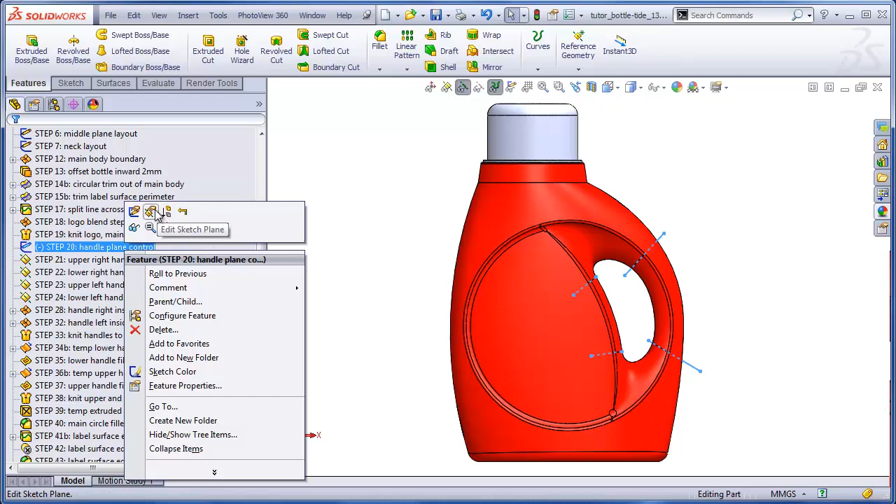This is part 3 of the Tide Bottle project. By the end of part 2, we'd completed the boundary for the main shape of the bottle, the recessed label area, and a step that joins the recessed label and the main bottle.

For this video, we are going to build a boundary for the right side of the handle surface, a boundary for the left side of the handle surface, a fill surface for the lower portion of the handle, and a fill surface for the upper portion of the handle. We will then knit all those surfaces together,

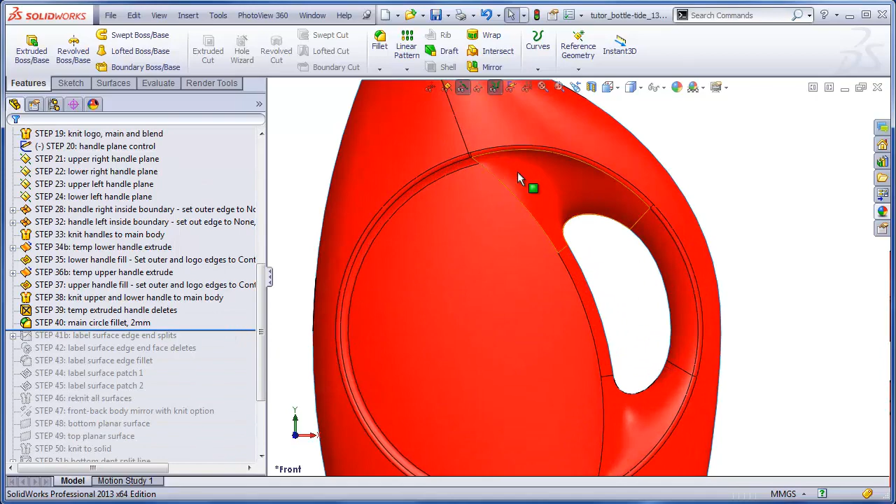and we'll add a fillet to this circular edge, and then we will try to add a fillet on this edge of the label surface, but we are probably going to have some trouble doing that because this surface becomes very flat in this area and it won't want to fillet in this zone.

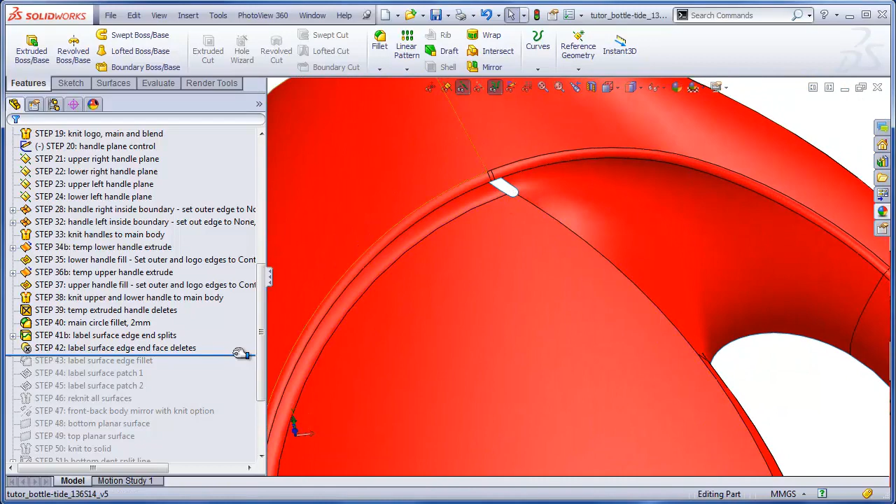So we will do a little trick where we will remove a little bit of our surface here, add a fillet, and patch it back in. We'll reknit everything together again, and that will leave us with all of the surface features to create one half of a bottle. This will take 26 or so steps to accomplish.

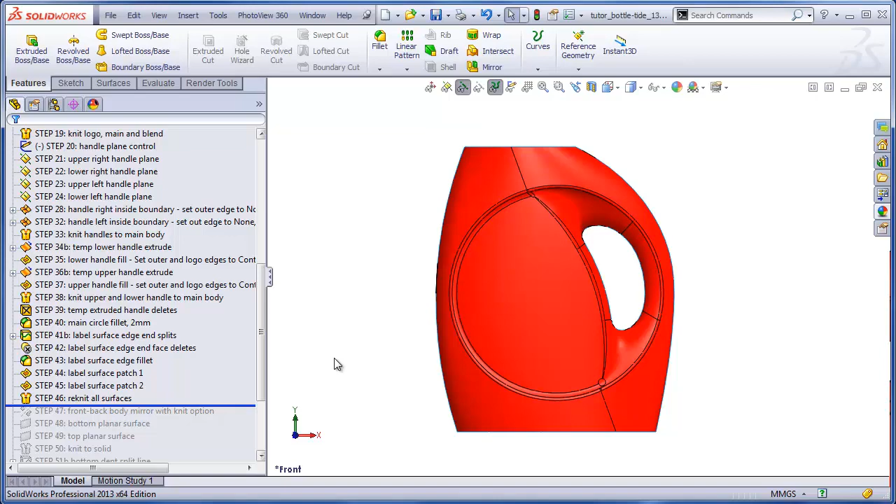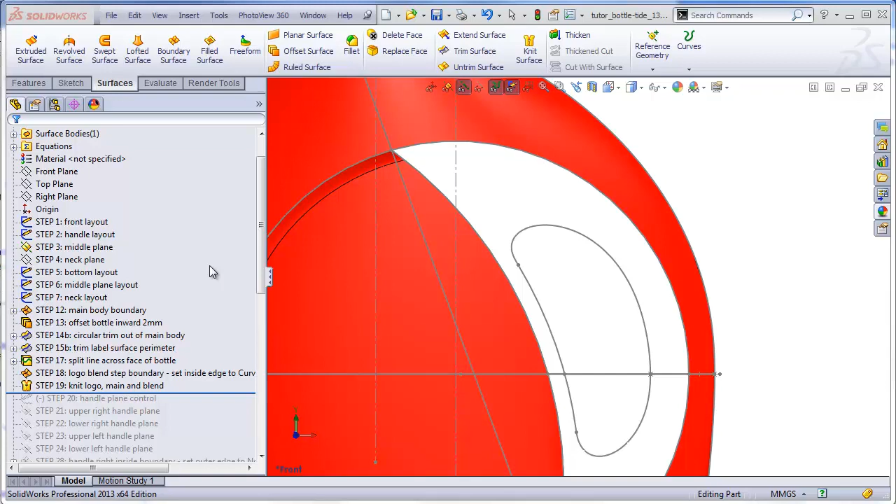So now what I'm going to do is roll back to where we were when we left off on the last video. Turning on my sketches, I see all my layout sketches here. What I need to do is create 4 different planes in order to build the surfaces of the handle. These planes are going to be tilted at some odd angles, so what I want to do is create a sketch that will control the location and orientation of those planes. So I'll roll forward to show you what my sketch looked like that did that.

When I drew my handle layout sketch, I just drew this as 2 lines. One is an offset arc, and the other is a spline that starts at the top of the arc, curves back down to the bottom of that arc. You may have drawn this in 4 pieces with 1, 2, 3, 4 pieces. In either event, you need to have 4 lines total. Where any arcs join together, such as here and here, that's where you want your lines to go.

So I'm going to have a plane right through here where these 2 curves join, a plane right through here where these 2 join here, and then in my case these 2 are located in arbitrary locations to split this upper area and lower area from this outer area. But if you have an arc that joins to this arc, then you want to put your line right where that join is here, and this line where you would have a join down here.

You can see that I haven't added any dimensions to any of these lines. It might be a good idea, that way you can have a precise angle control on each of these, but for now I'm just eyeballing it. I'm going to close this sketch now.

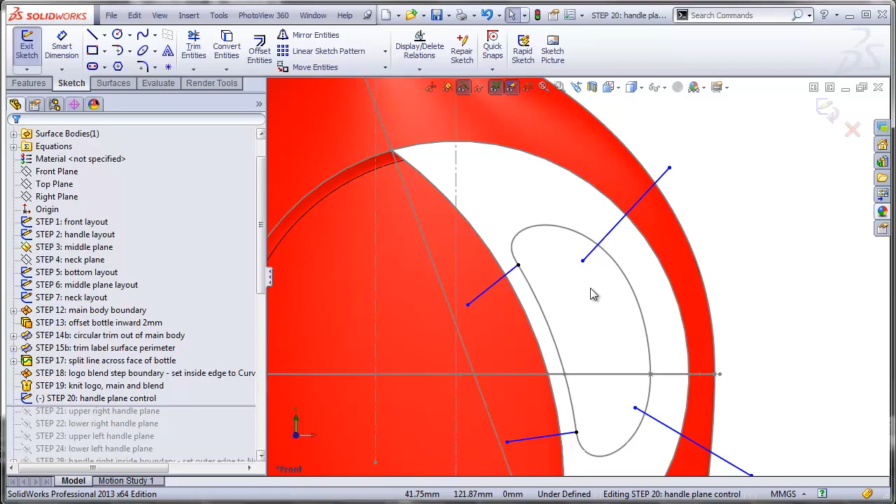And the way I'm going to create the 4 planes using this sketch is to simply go to my reference geometry for planes. And the first thing I will choose is my front plane, and I'll start with this line here. And what that's going to do is default to making a plane perpendicular to the front plane going through that sketch element.

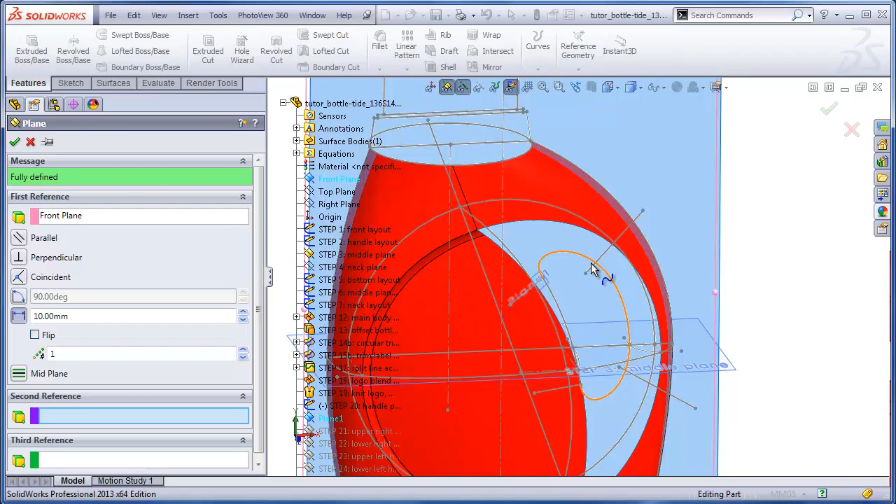Do the same with the next plane. Again, go to reference geometry plane, choose my front plane, and now this sketch element, and that makes a plane perpendicular to the front plane and passing through that element. And we do the same for these last 2 lines as well.

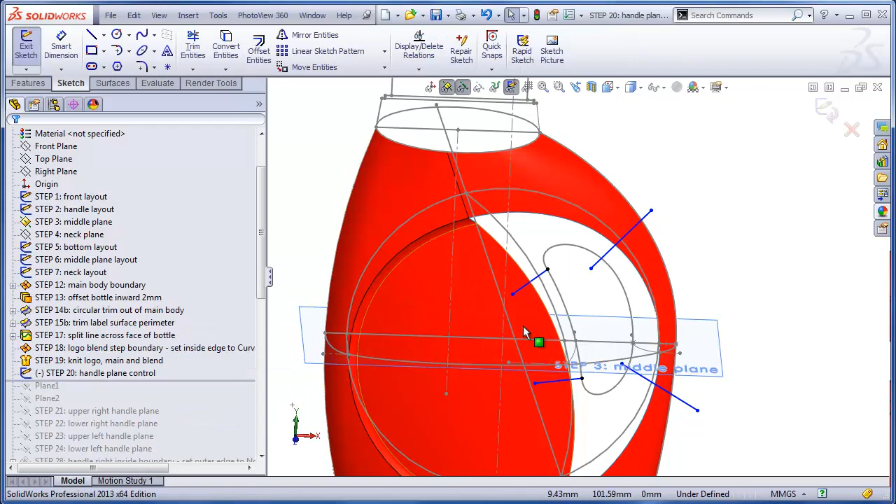So this takes a total of 5 steps to complete. 1 step for this sketch that controls the orientation of the planes, and 1 step for each of the planes that's actually created. Another way you could do this, if you want to be a little lazy about it, is just create this sketch and then just go ahead to your surfaces and extrude those lines. And it doesn't really matter how far you extrude them.

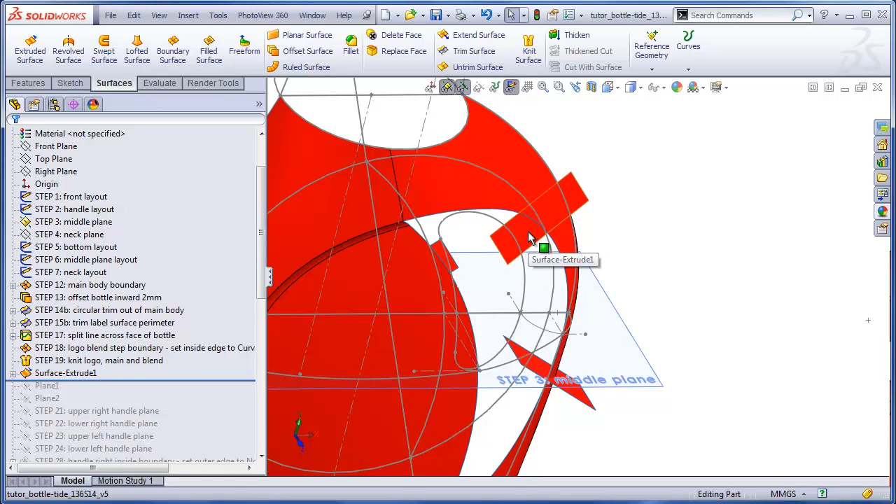Now what you've got are 4 flat surfaces, and you can use these as sketch planes instead. And it doesn't even matter if they're too small to contain the sketch that you want to put on there. Once you select the flat surface as your sketch plane, you can draw the sketches as large as you want.

Once you are done using these surfaces, you can then delete them by going up to your surface bodies and just selecting all of them, right-clicking and saying delete bodies, and that gets rid of them, cleaning up your model. Now, I only recommend using this trick if you plan on using these extruded surfaces for just 1 or 2 sketches and then plan on immediately getting rid of them. Otherwise, you're going to find your model being rapidly cluttered up.

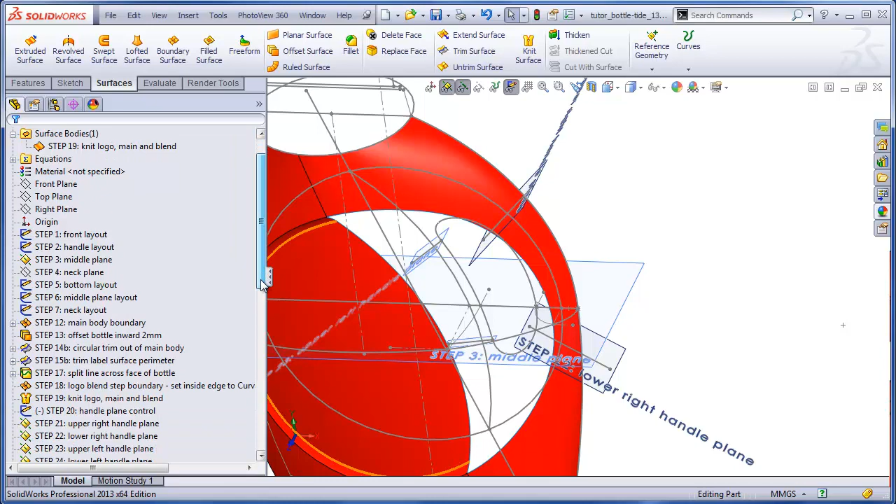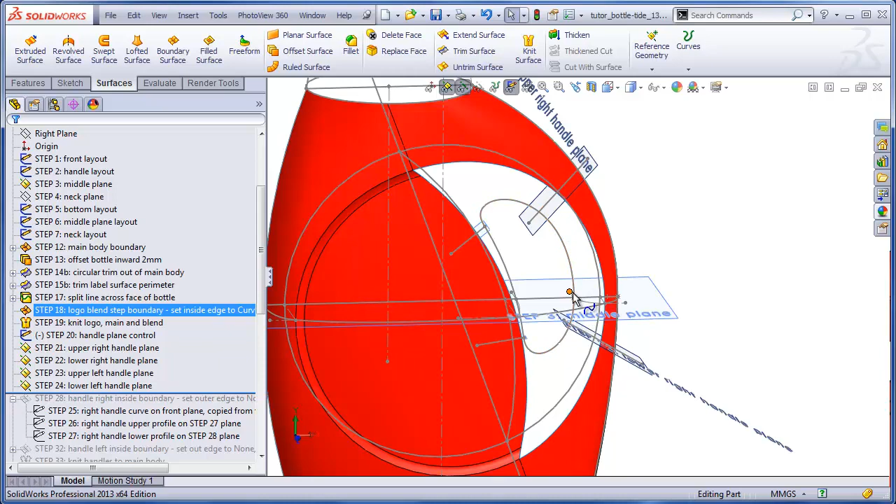I've rolled my model forward to the point where I've already added these 4 planes, as you can see here in the front view. Now I'm going to start building some sketches that will be used for this portion of the handle. The first thing I want to do is make a sketch of this line on the front plane. So I'll do that by starting my sketch. I'm going to copy this element from my layout sketch.

And I actually need this spline to start here and end here. And I can do that by trying to drag these points around to my sketch planes, but a lot of times that gets a little unpredictable when you try to do that with splines. So instead what I'm going to do is copy this line and this line from my plane control sketch and use that to trim away the excess. So clicking here and converting entities, and here and converting entities.

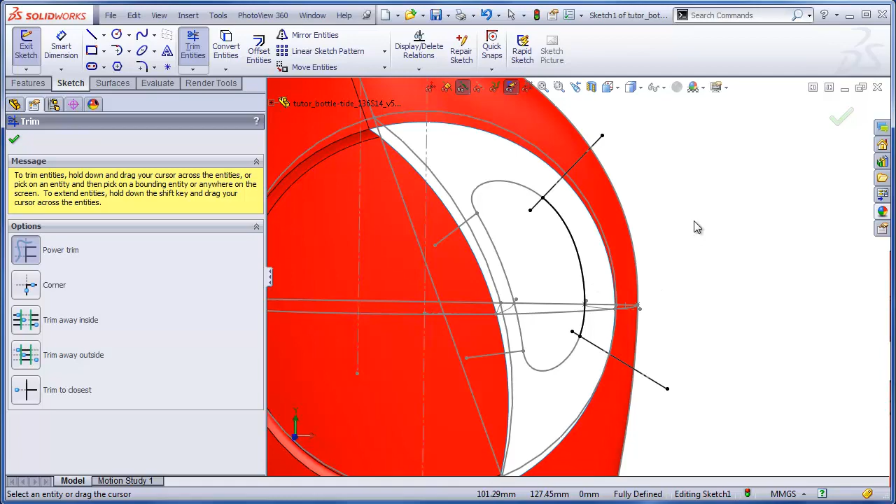Let me hide all of my planes here, which are creating a little clutter. I'll turn these two into construction lines and now use those to trim away the excess. That gives me just the piece that I need for this boundary, which will be built here. Now let me hide some of my layout sketches so I can see exactly what I'm doing. Here's the sketch that I just made. That's going to form this edge of the boundary on the front plane.

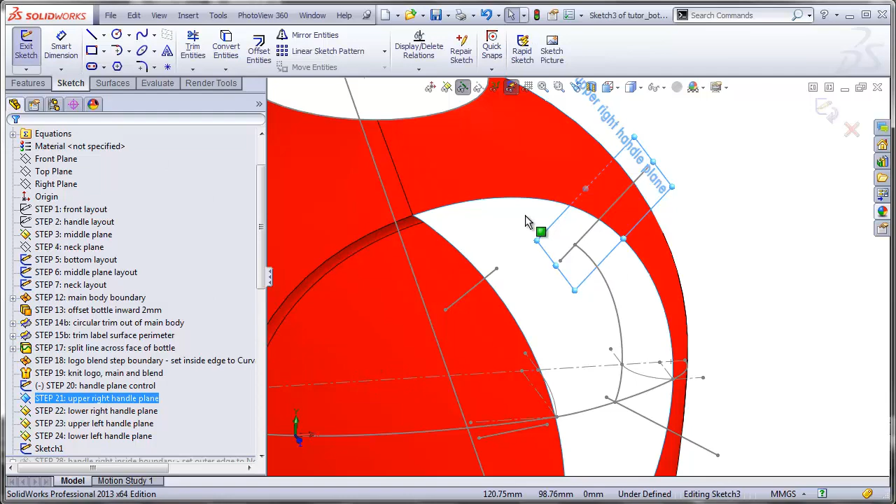We need to add a profile going from this point up to this open edge of the bottle. Later on we're going to add another one down here. This profile will go onto this plane here, which I've just highlighted. So we will make a new sketch. And I can draw either a spline or a simple arc. I could just use a 3-point arc, go 1, 2, 3, make this end pierce this arc here, this end pierce the opening of the bottle.

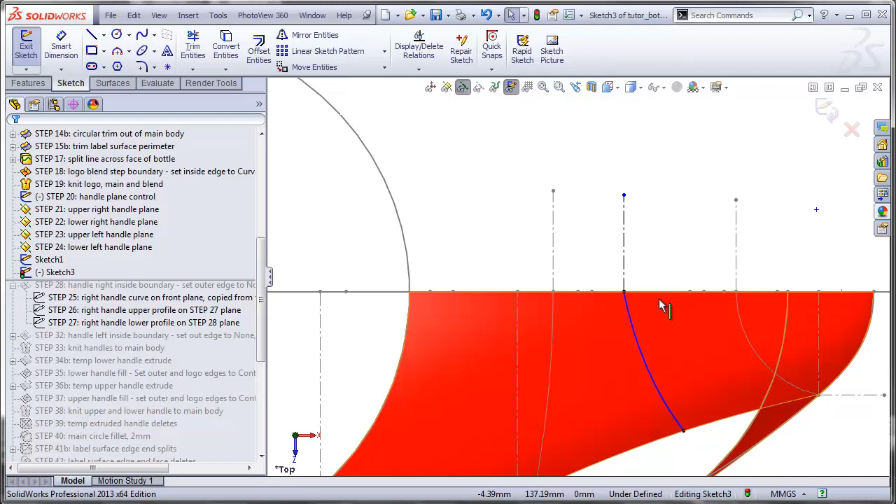Looking at this from the top view, we'll add a construction line and make that tangent to the arc. I think I'll just leave that as an arc for now. I need to draw a similar profile down here. That's going to be on this lower right handle plane. So making a new sketch. Since I drew an arc up here, I guess I'll just do the same down here.

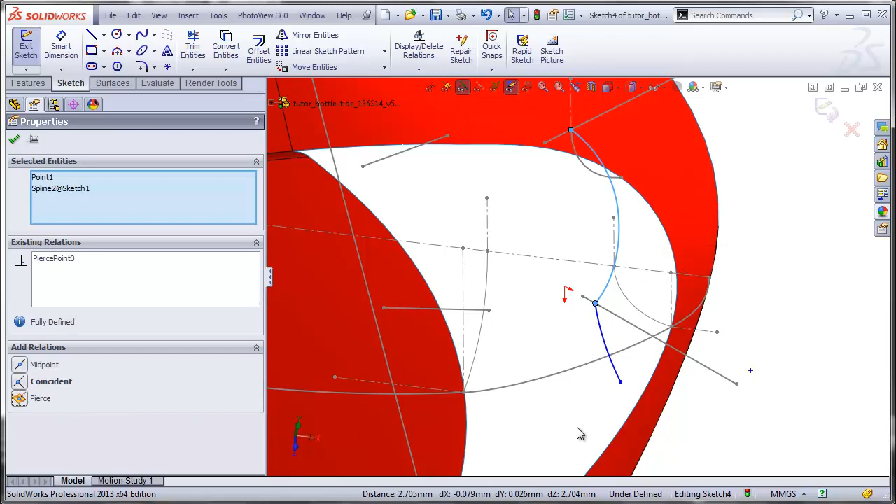So 1, 2, 3. Pierce to this end. Pierce to my opening. Again, looking at this from the top view, adding a construction line and making those tangent. I'll finish that sketch. Now I've got all the elements that I need to make this portion of the handle.

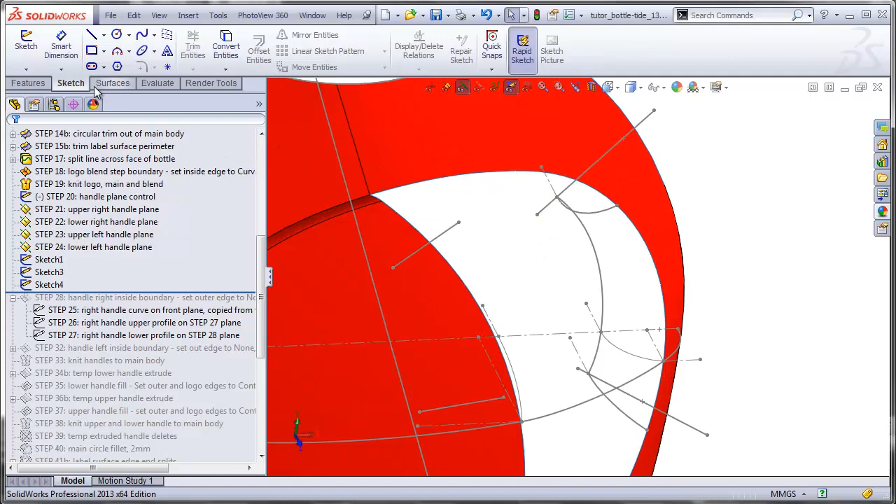Going to a surfaces boundary, select this sketch, then I'll select the opening of my handle. And you see, because this edge is going all the way to here, it wants to make the boundary go all the way to this point. I'm not going to worry about that because as soon as I add direction 2, which will be this sketch and this sketch, it's going to automatically trim that back to those sketches.

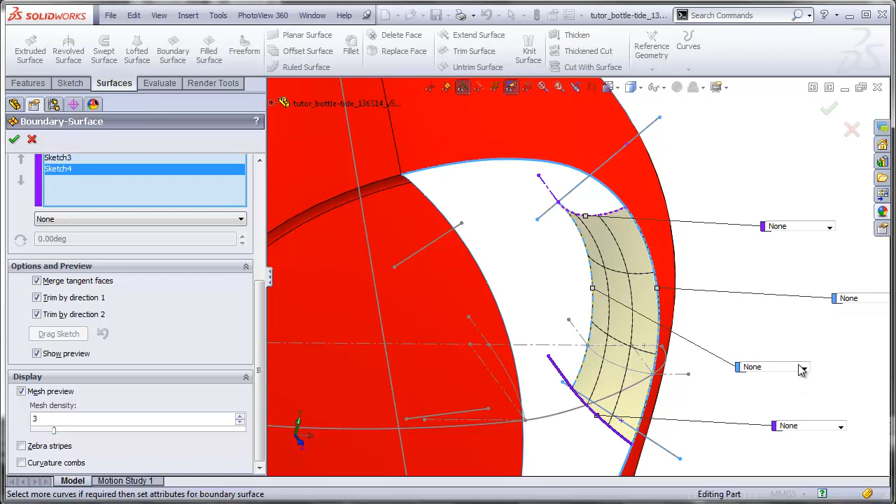If I want to be super careful about it, I can always activate the trim by direction 1 and by direction 2, but it's not changing anything here. So let me just turn off the curvature comb so we can see that a little more clearly. Now, because I want to mirror this handle later on to the other side, I need to make sure that the setting along this edge is set to normal to profile. And there's the first surface for my handle. Now I'm going to build the handle surface on this side using a similar technique.

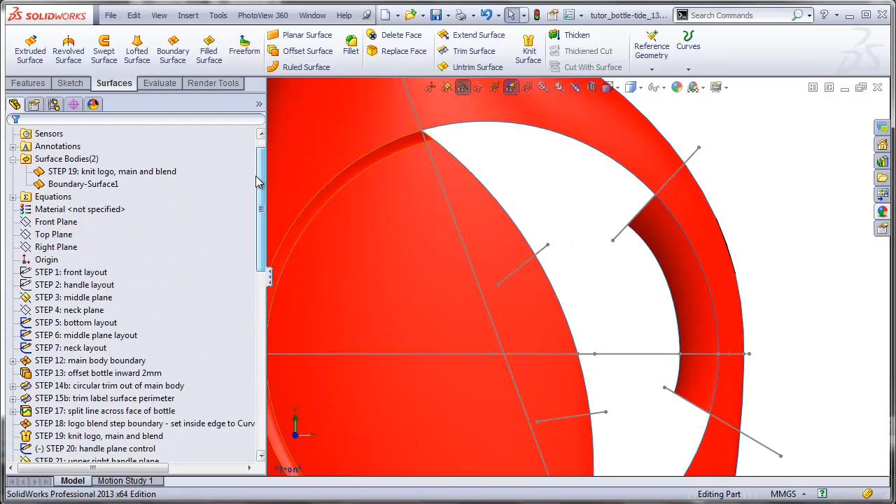And I need to copy this portion of the handle contour from my handle layout, so I will make that visible. I will make a new sketch on the front plane and just copy this arc right here. Now I'm going to draw some new contours on this upper left plane here and my lower left handle plane here.

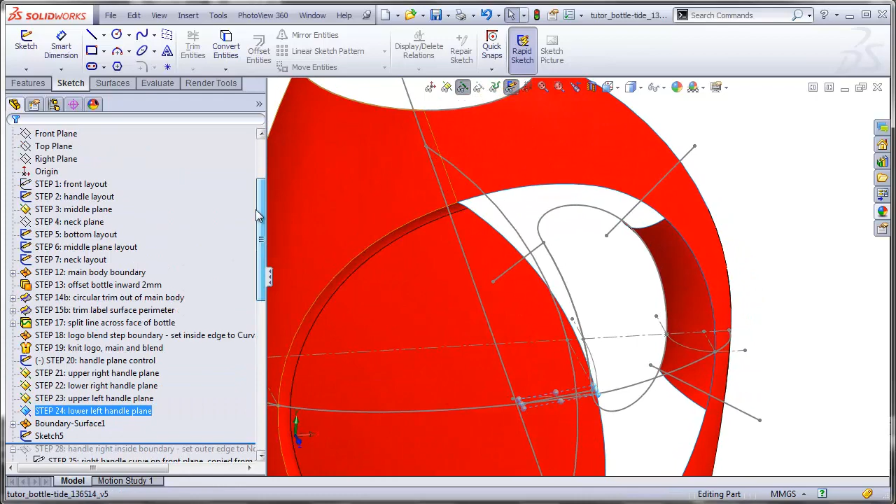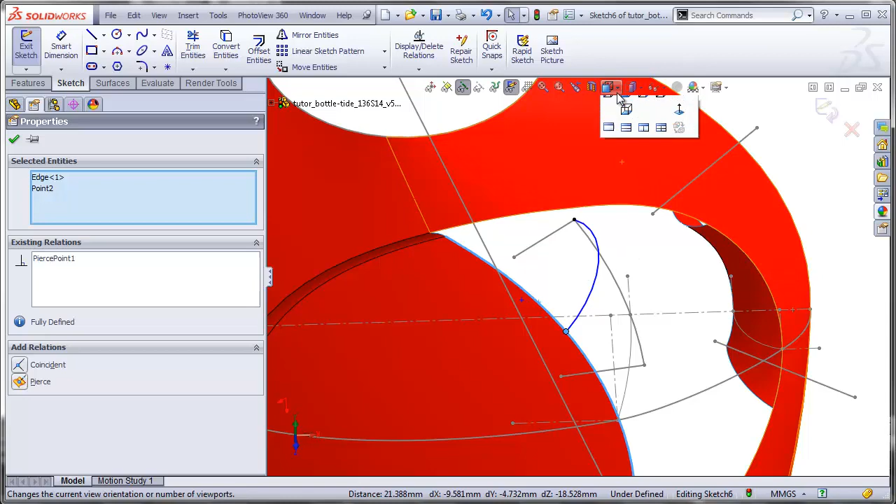First I'm going to hide my handle layout, so all I see is this sketch here. Making a new sketch on this plane, we'll do the same thing where I think I will just select a 3-point arc, piercing to this arc here, piercing to this open edge here. Looking at this from the top view, making a construction line and making that tangent.

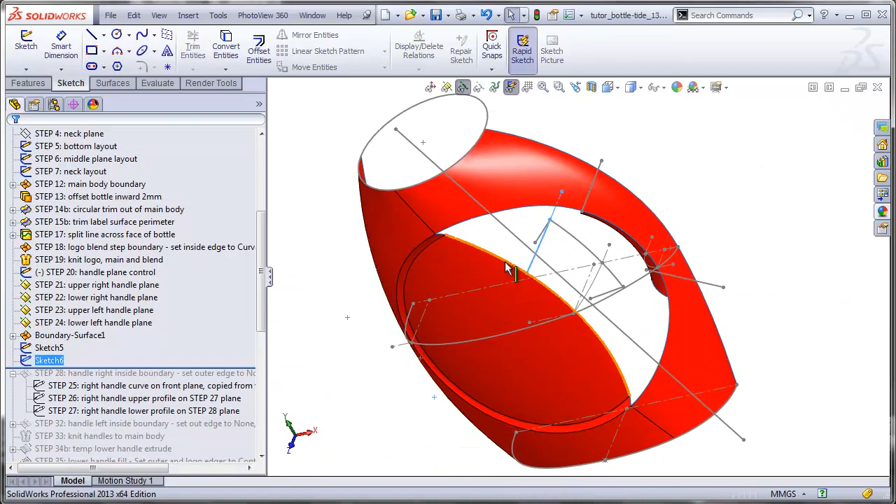And again, if you decide to do this as a spline, make sure that the handle for the spline at this end is going straight up and down. Now on our last plane that we created, we're going to make one more sketch. Again, going with a 3-point arc, pierce, pierce. Take a look at this from the top view. Make our construction line. Make those tangent.

And we have all the elements we need now to make this boundary surface. Something that's interesting here is you recall that when we made this middle layout sketch, we actually made a sketch of where we thought that surface was going to go right here, and also where we thought this handle surface was going to be going right here. As it turns out, we didn't even use those at all. In fact, I can even hide this sketch because it's just getting in the way.

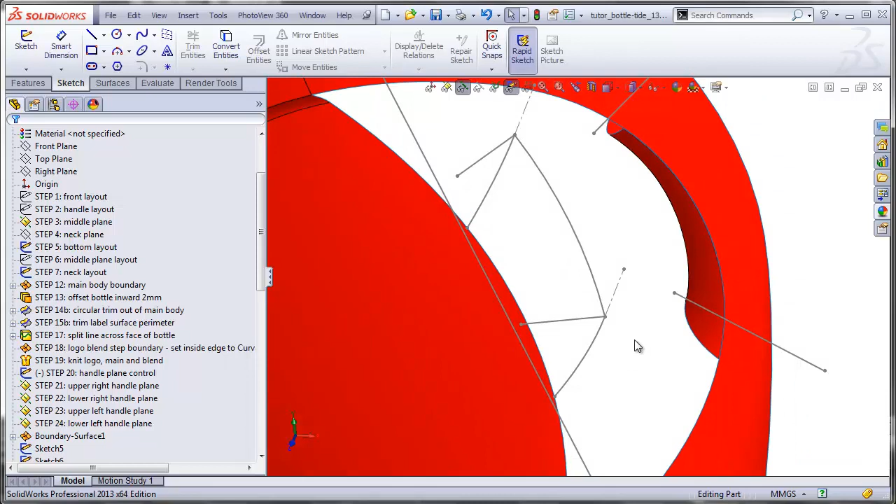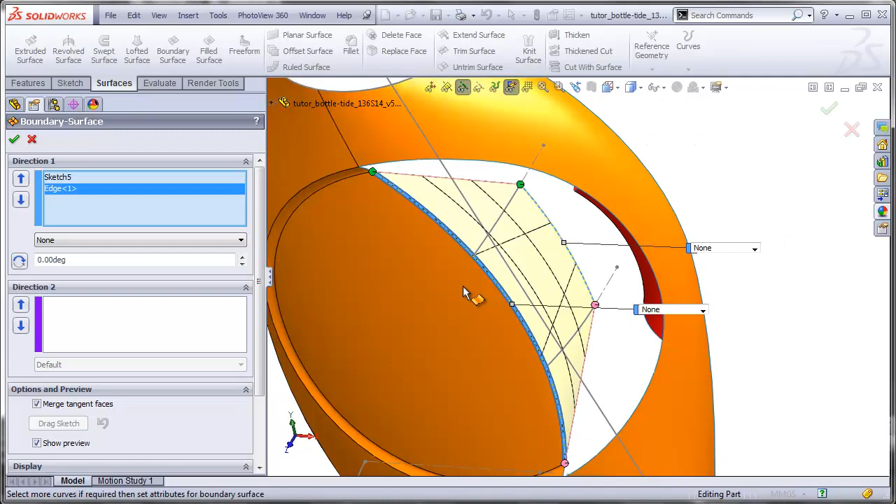So now we can make another boundary using this edge of the opening, these two new contours that we created, and this contour here. You can also hide this sketch here, which was used for making our handle planes. And going to surfaces, once again, boundary surface, select these two elements for direction 1. And again, it wants to make the boundary go all the way to here and all the way to here. Don't worry about that. And for direction 2, we select this sketch and this sketch.

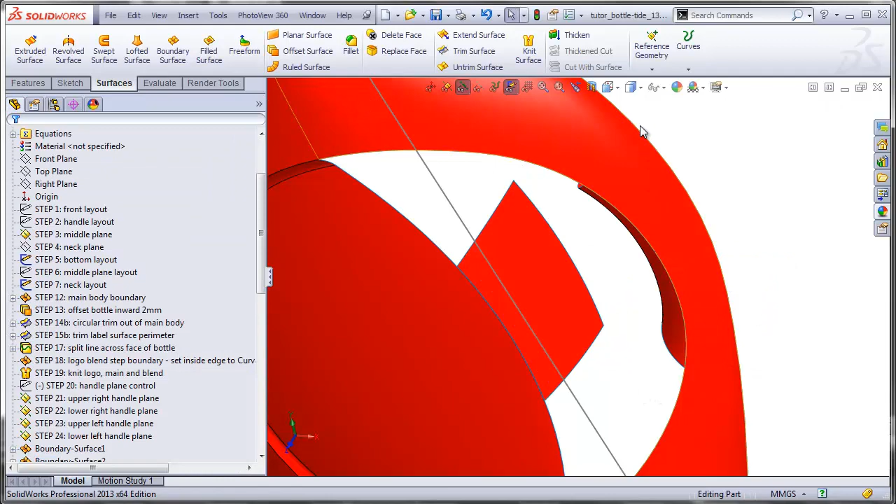Now we see it's trimmed back to where we want it to go. And once again, on this edge, we want to make this normal to profile. And finish. So here we see our first two surfaces of the handle. Now we are going to build this lower surface of the handle, and if I turn on the handle layout again, we see that this surface is going to require 1, 2, 3, 4, 5, 6 edges.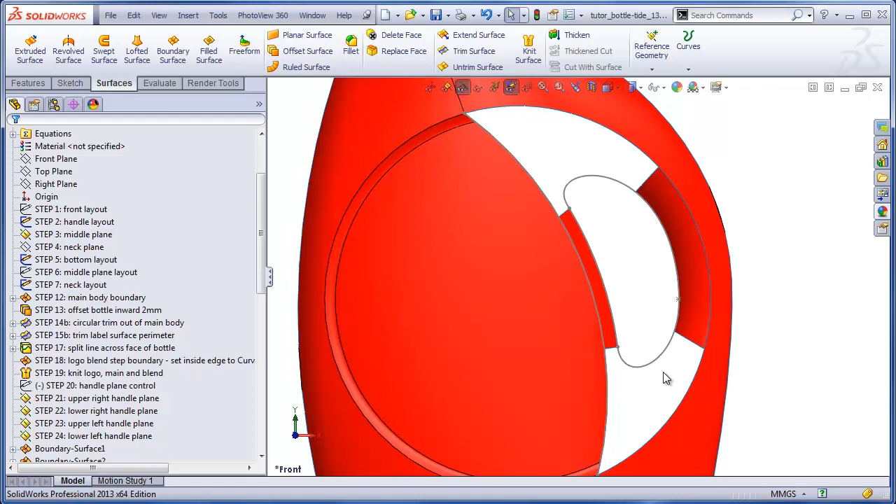We know that we can't do that with a boundary, and we will have to use a fill surface. We also know that fill surface does not have a normal to profile option. So if we attach the fill surface to an edge here, we don't want to attach it to a sketch because we won't be able to control the fill surface where it meets our mirror plane. So we will use the trick of copying this portion of our handle layout sketch and extruding it normal to my mirror plane, which in this case, of course, is the front plane. So starting a new sketch on my front plane.

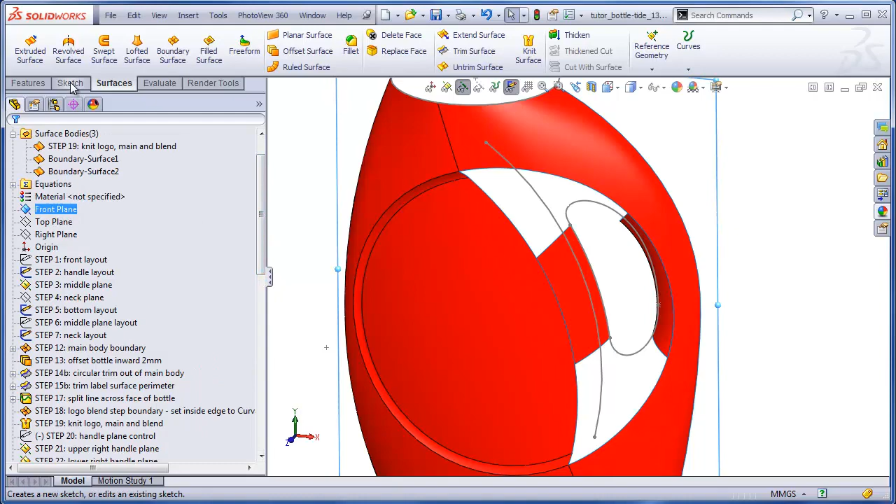I'm also going to turn on the sketch that controlled my planes for the handle because I can use that for doing some trimming. I'm going to copy this curve here, but I only need this portion here. So I will also copy this line from my plane control sketch, turn this into a construction line, and then trim away the portion that I don't want.

Now I can extrude this surface. I want to go in this direction. And the distance doesn't matter too much. I'll just make that 10 millimeters for convenience. And now I have all the edges that I need to build this lower fill surface.

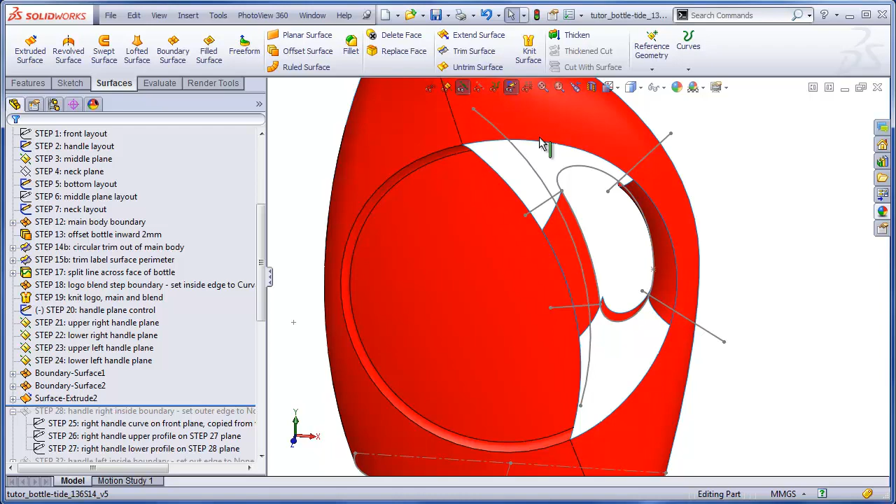So hiding my sketches, go to Fill Surface, click on 1, 2, 3, 4, 5, 6 edges, and you notice that it does not want to make a fill surface. So what is the problem here? The problem is that this edge here should really begin here and end here so that we have one contiguous loop for the fill surface. But we know that this edge is actually wrapping all the way around to here.

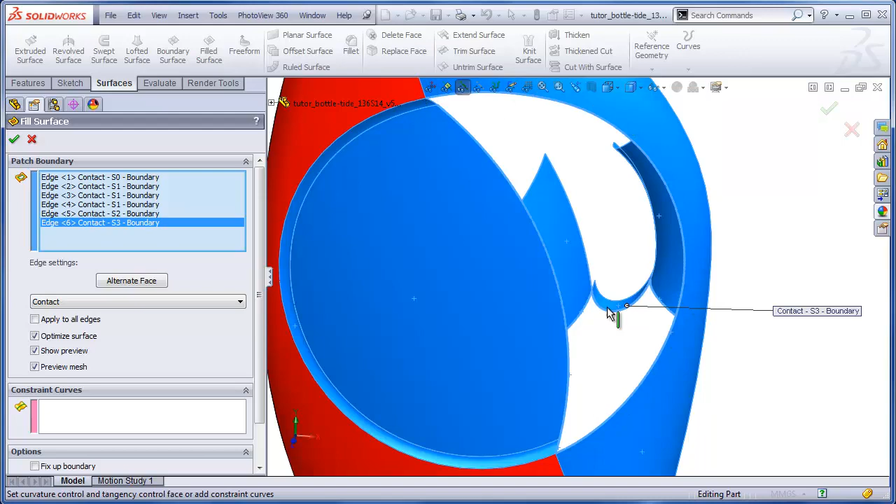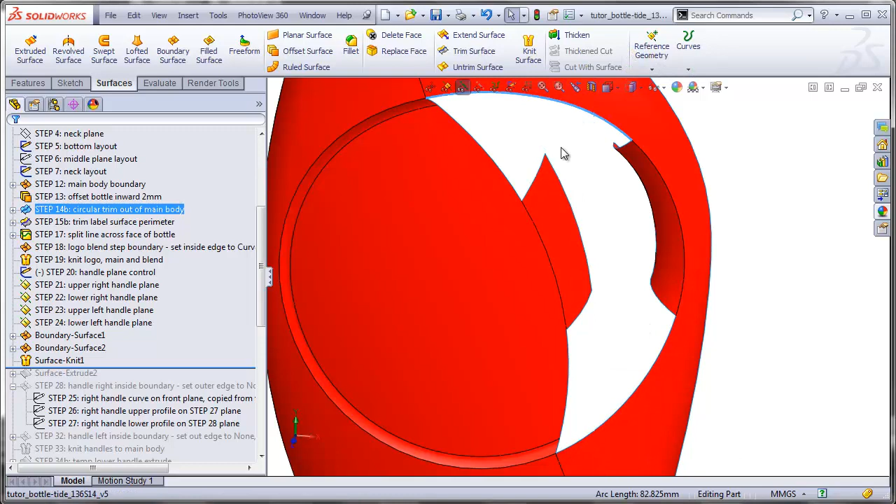So how do we solve this problem? The answer is that I'm going to roll back before I made this extrusion here. And all I have to do is knit all these surfaces together that I currently have. So going to Knit Surface, I will just knit together these 3 surfaces. And now we see that this edge is beginning and ending where it needs to, and the same will happen for this edge as well. Now I can roll forward. Here's my extruded surface that will be used as an edge for my fill, and now I can successfully do the fill surface.

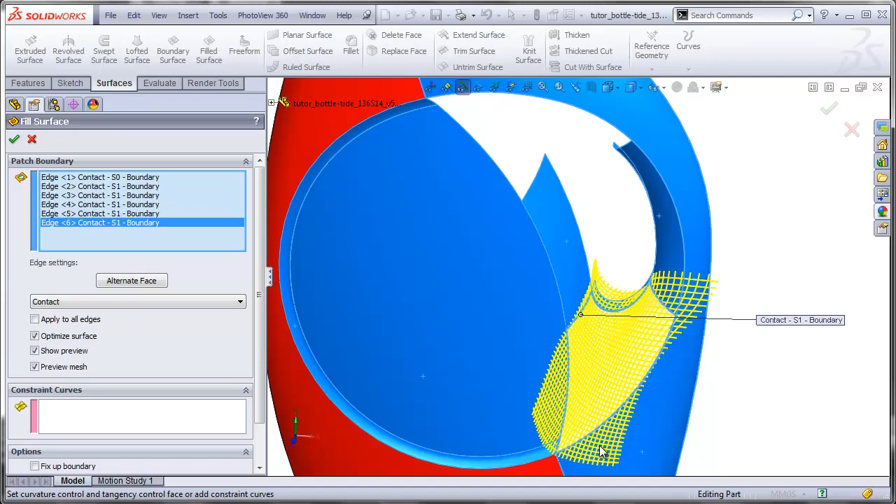Once again, 1, 2, 3, 4, 5, 6, and we see that the fill surface is successful, and I need to do some controls here to make this shape properly.

This edge at the mirror plane needs to be tangent. This edge where we join the actual handle surface wants to be curvature. This edge is going to be a sharp edge until we later add a fillet, so that should be left as contact.

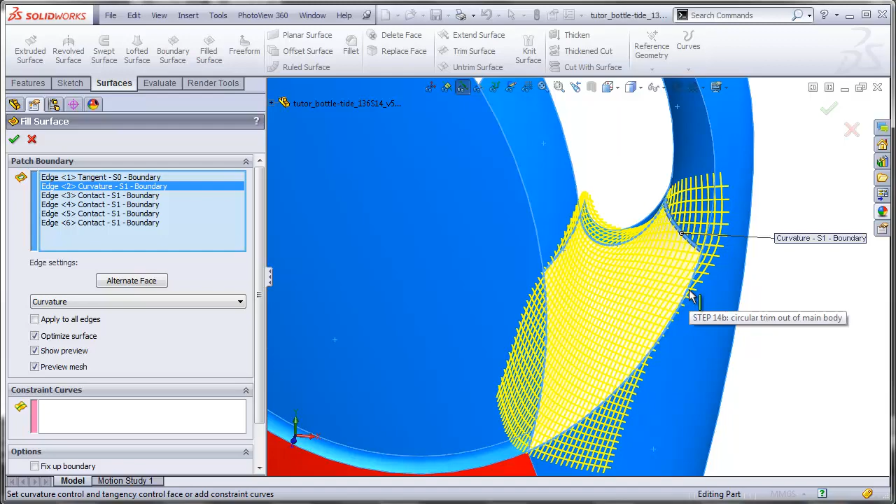This edge here we are going to blend into, so we want to make this curvature. This edge is going to be a sharp edge along here, so we want to leave that as contact. And this edge we are going to blend back into this handle surface, and we will make this curvature as well.

Finishing that, we see that this 6-sided fill surface has done a remarkable job of filling this in and matching up with all these different features, transitioning from a contact control to a curvature control and back to a contact control. If you can't get the curvature control to work properly at this edge, and this edge, you might have to resort to using tangent.

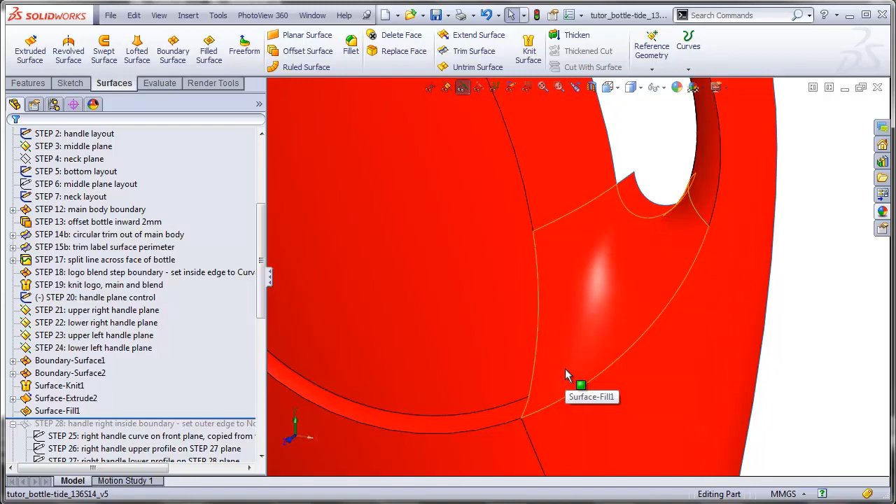Now we're ready to do the same thing for the upper portion of the handle. Turning my sketches back on, I need to make this piece of the handle in a new sketch.

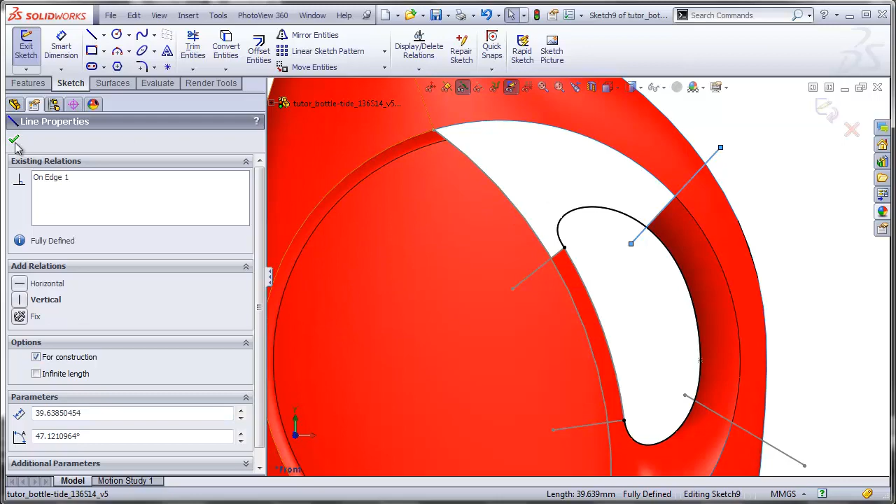So on my front plane, going to Sketch, copying my handle layout again, this time copying this line from my plane control sketch, and making that a construction line, and then using my trim to get rid of this excess down here. And now extrude that sketch.

And once again, I want it to go away from the bottle, and 10 millimeters is fine. Turning my sketches back off, I can now once again make a fill surface, 6 sides once again.

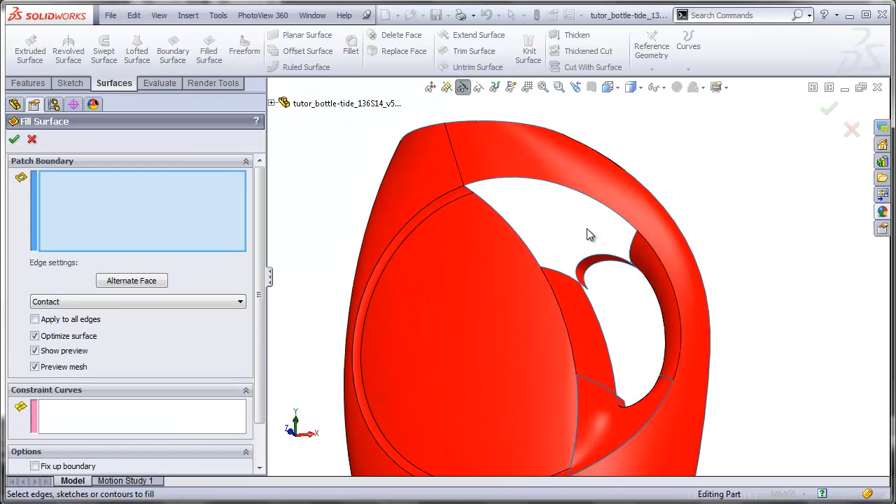So 1, 2, 3, 4, 5, and 6. Starting with our first edge here, we need this one to be tangent because it's on the mirror plane.

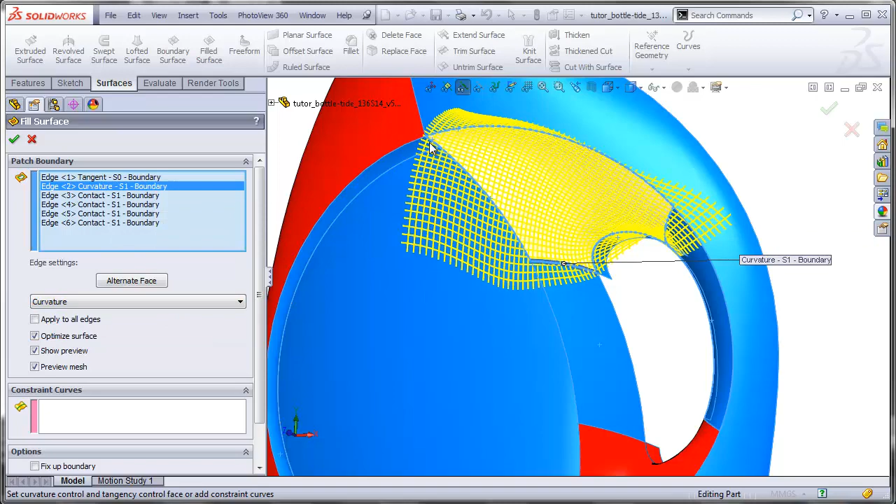The second edge here is going to be curvature. The third edge we leave as contact. The fourth edge we're blending into the step here, so we will make that curvature. The fifth edge is left as contact, and the sixth edge is set to curvature.

There we have all of our handle surfaces. We have 2 surfaces that were just temporary for the purpose of making the fill surfaces. So now we can get rid of these.

We'll just go up into the surface bodies. And the surfaces we want to get rid of are this Extrude 2, holding down my Control key, Extrude 3, right-click, Delete Bodies, and this adds a Delete Bodies feature to the feature tree. So we're all cleaned up there.

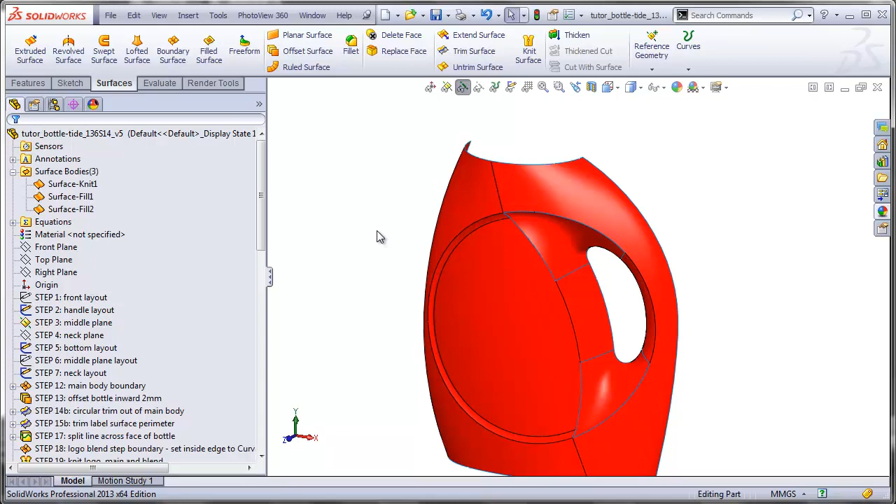And our next obvious step is to knit everything back together. So we have 3 surfaces to knit. And now we have a single surface body.

The last thing I want to do for this video is add a fillet along this edge. That's supposed to be 2 to 3 millimeters in radius. If I choose fillet, set that to about 3 millimeters, and click on this edge, we see it highlights the edge, but it's not looking like it's actually going to put the fillet in for me.

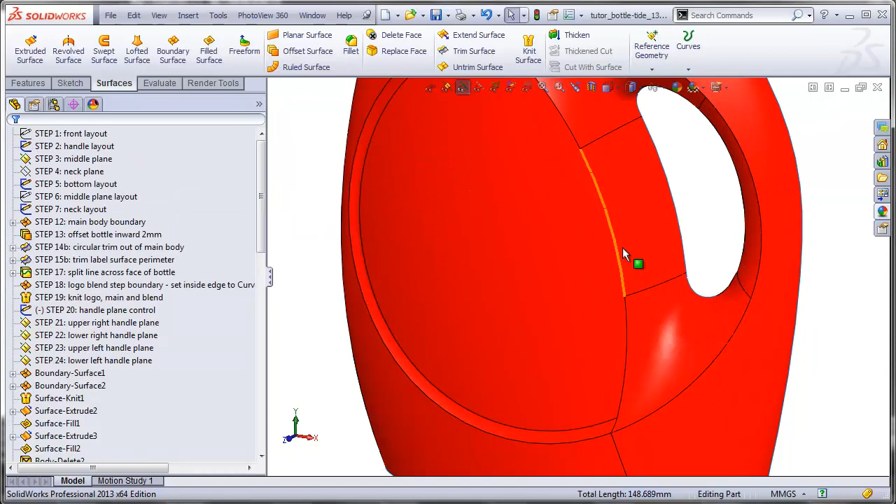I can try clicking on all of the edges to try to force it to fillet, but nothing really seems to happen. If I hit the check mark, it comes back with an error. So I will X out of that, and the question is, why is this happening?

The reason is that in this area here, we have the two surfaces meeting at something approaching a 90-degree angle, but as we get closer and closer to this area here, that meeting angle gets wider and wider and wider until these two surfaces are in alignment with each other because of the fact that we use the curvature control along this edge.

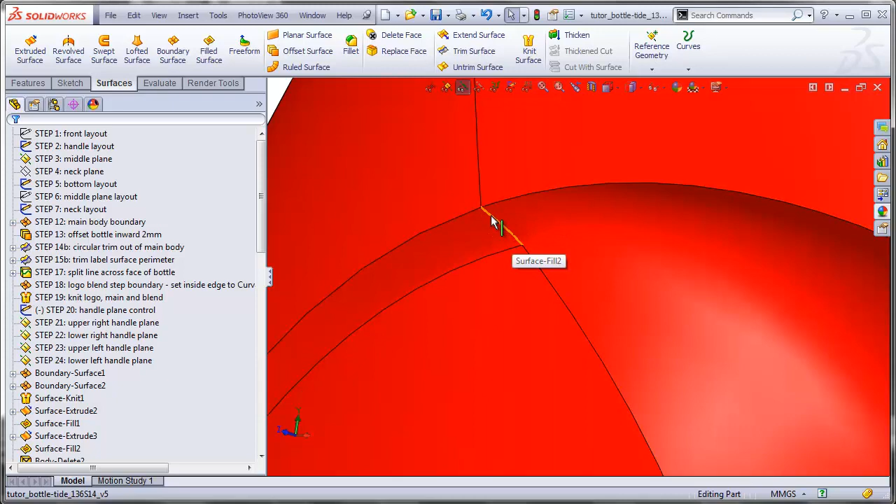That means the fillet doesn't want to go up into this area because usually you have to have an angle between two surfaces to make a fillet between them. I've experimented with changing the curvature control on this fill surface at this edge to contact, getting rid of the curvature control so there would be an intentional angle between these two surfaces. But it seems the curvature control is needed to help shape this portion of the fill surface. Without that control, this area gets a little bit strange.

So what we are going to do here is a little trick that will allow that fillet to go in onto this edge. We'll trim back this surface to an area where the two surfaces meet at a slight angle so that we can put a fillet along this edge, and then we will patch in the hole that we created with the trim.

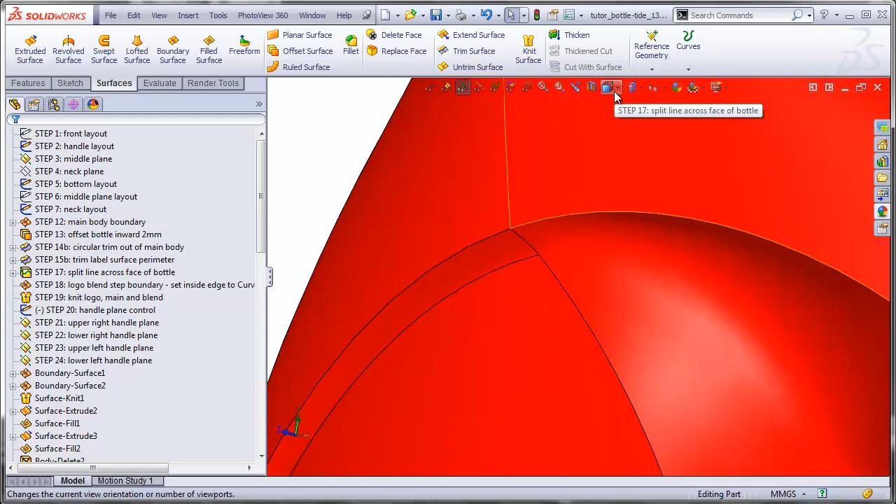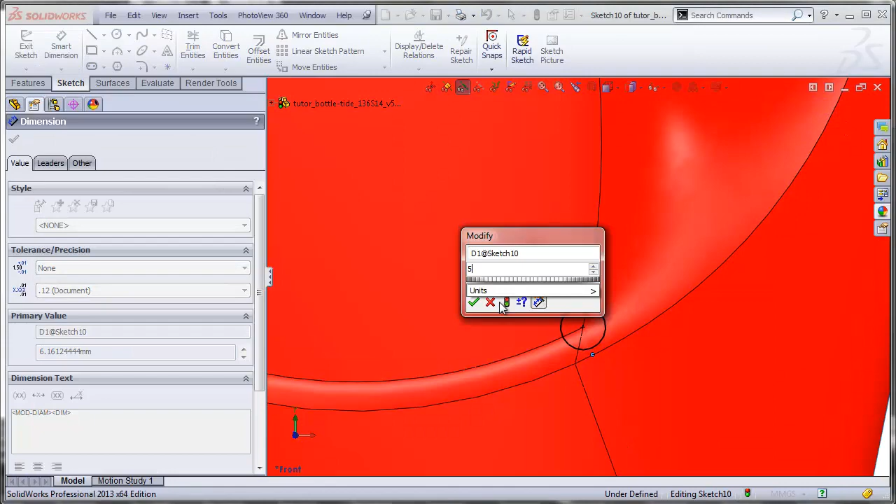Probably the easiest way to do this is simply make a sketch on our front plane, and then just make a circle with its center here, and we'll do the same down at the bottom. We'll make the circle about 5 millimeters in diameter - this is a little bit arbitrary. We'll make these two equal.

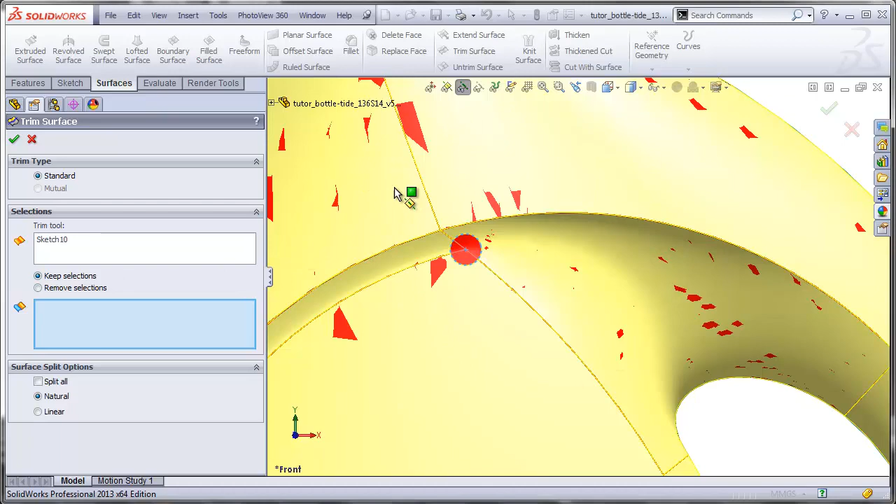And then we'll use the trim command. I think what we will do is use the keep selections, and I'll just select the larger part of the bottle here. That gets rid of a hole here and a hole down here.

Now if we zoom in on this and tilt it a little bit, you can see that this edge, where it runs into the hole, is actually the two edges or surfaces meeting at a slight angle. Also, this edge now ends in an open area, so there's no complication for the fillet trying to blend into another surface where it finishes. It can just end right here.

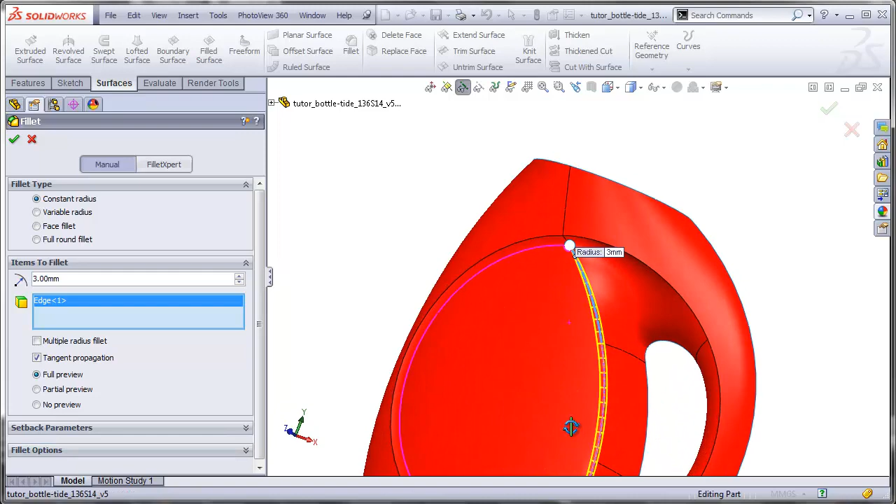So now I can add my fillet. We'll try about 3 millimeters again. Click on this edge, and now we see the fillet is successfully added. The only downside is that the fillet looks very small down here, but because the surfaces open up to a very shallow angle here, the width of the fillet is very narrow.

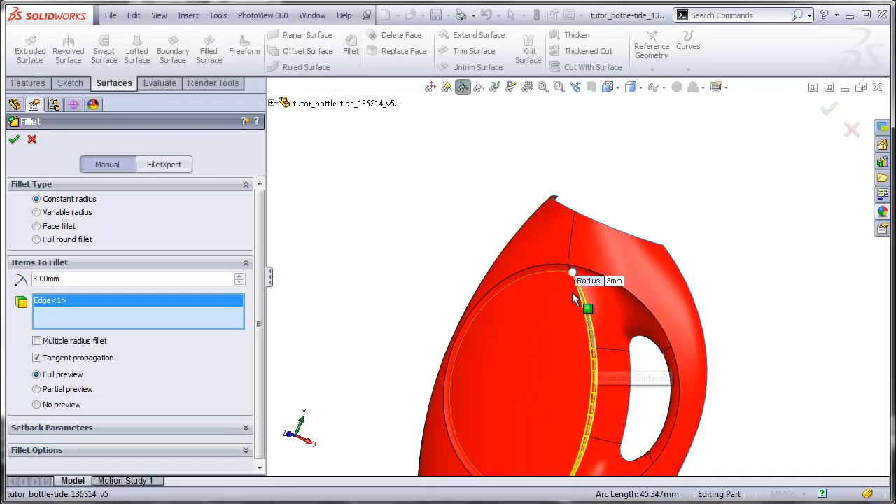I've tried adding a face fillet here - it doesn't seem to want to work. Another approach is to try adding a variable fillet and control the radius along the edge to try to get the width of that fillet to look a little more consistent all the way along its length. But we won't fiddle with that - we'll just finish this here.

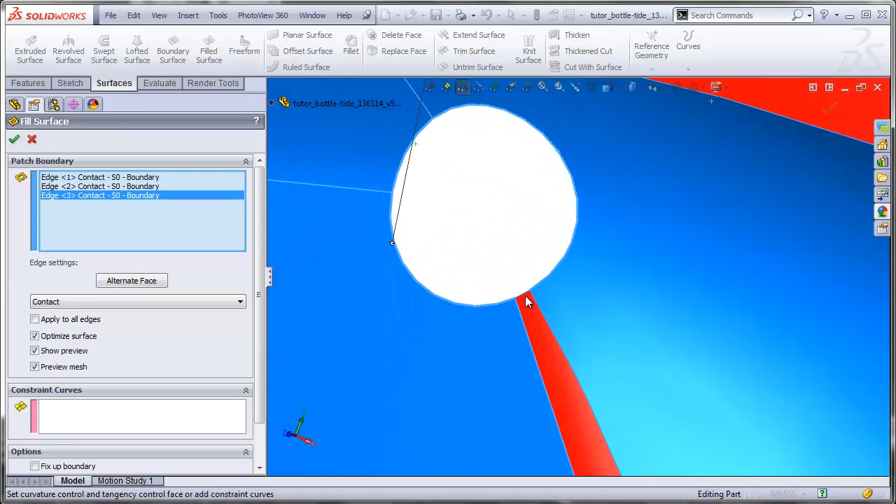Now we have a surface with two holes in it, so we can patch that in with our fill surface. This is very easy - we'll just click here, here, and here, 3 edges total. We will apply curvature control to all edges, and that's giving me a little bit of a lump there, so I might want to go back and change all those curvatures to tangent.

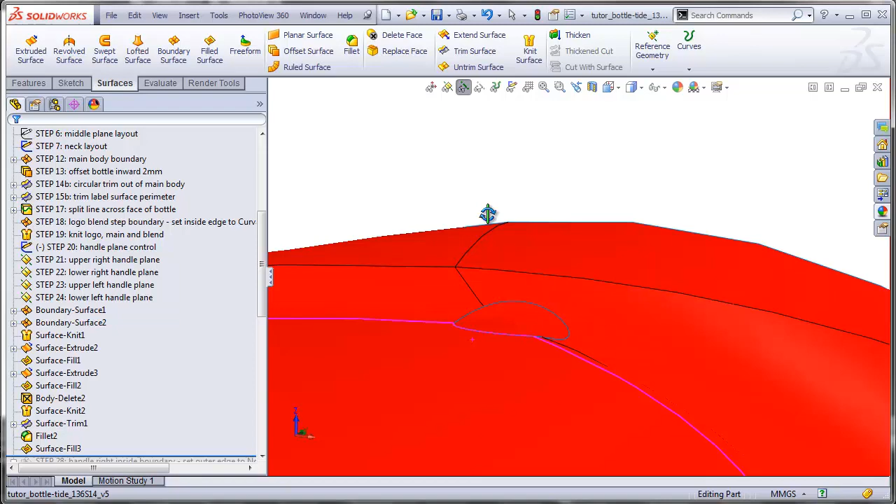And that looks pretty good. Let me turn off the edges, and I'll turn on my real view graphics so we can see how this looks. We can see a little bit of a lump here where it sort of fades out from this edge fillet into this zone here.

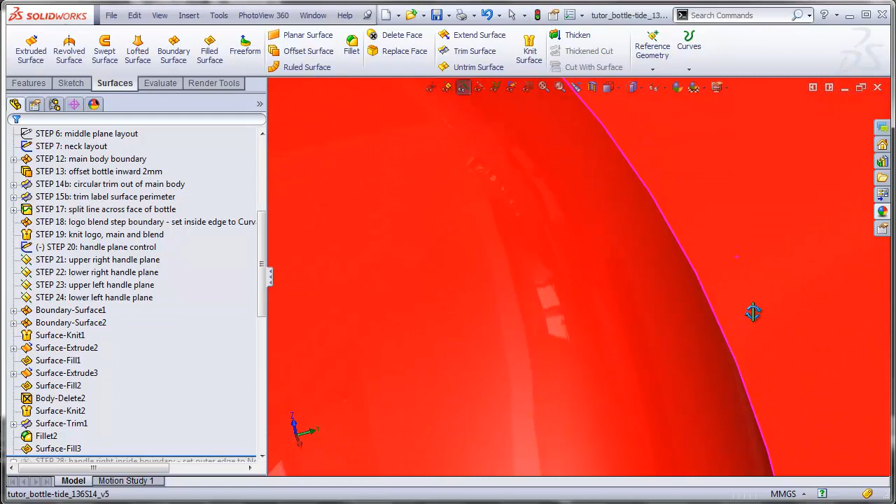Now another option is to trim out a different shaped opening. So rolling back again, turning my edges back on, and we'll turn real view back off. I'm going to again make a sketch on my front plane, and what I'm going to do is take this edge and just offset it about 1 millimeter. I will go bidirectional, and I'll drag this off into here. I will just add a tangent arc that connects these two ends together.

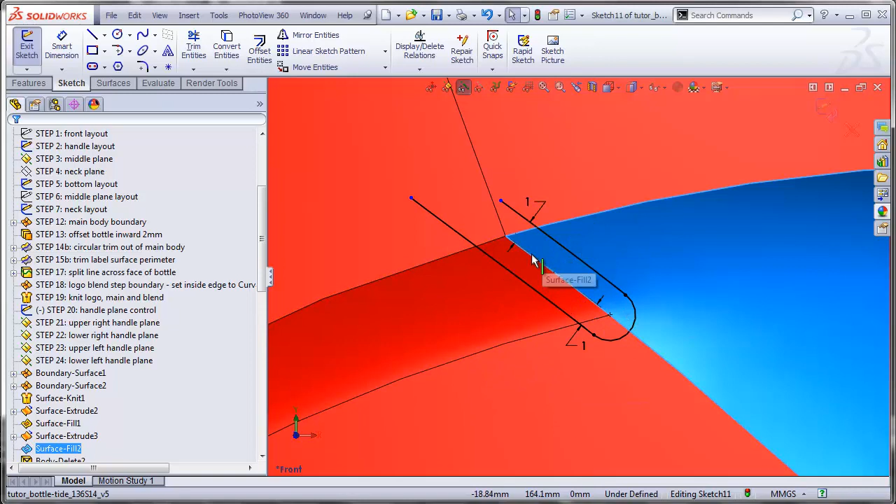I'm purposely going past this edge, and instead of using the trim, I'm going to split these surfaces and then delete them. That way I don't have to make the trim surface perfectly match this edge or this edge, which sometimes can create problems when you're trying to do a trim that matches an already existing edge. So I'm going to go to split line, insert, curve, split line, and I'm going to split this surface, and this surface.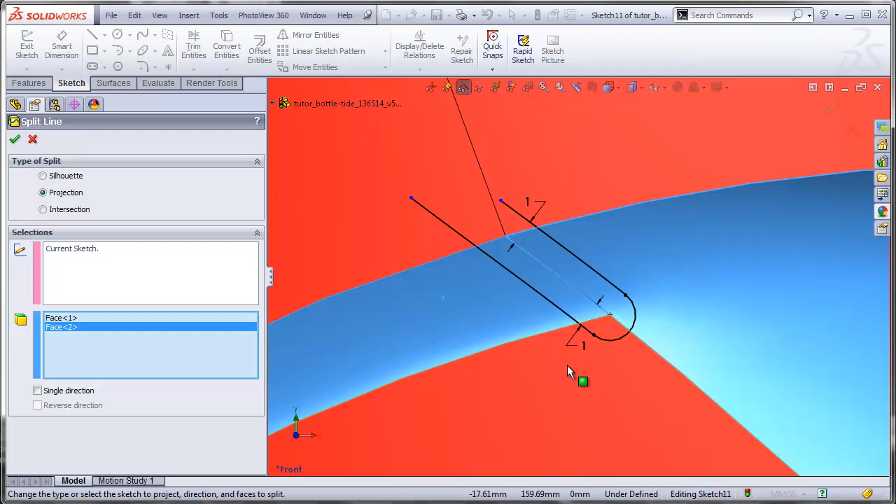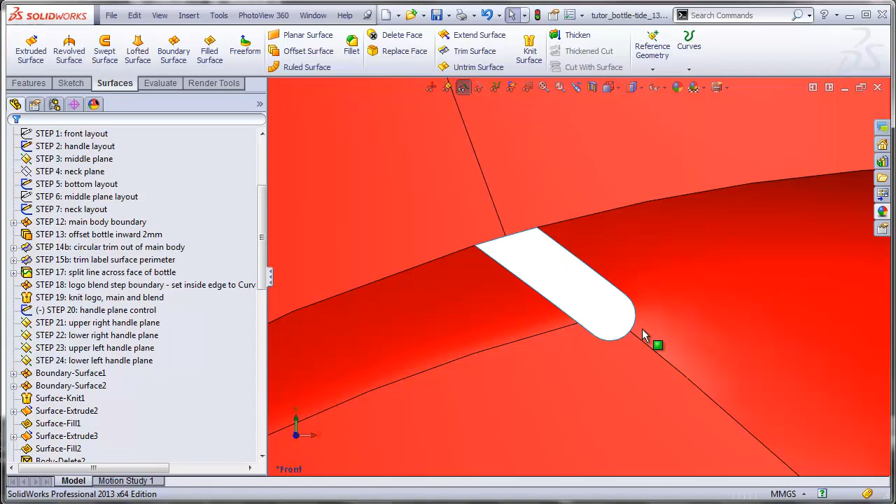Now going to my surfaces, I will delete face and select these three pieces. Now I have an opening that more emulates the direction of this edge, as opposed to the circle I had before, which was somewhat arbitrary as far as the shape of this edge was concerned.

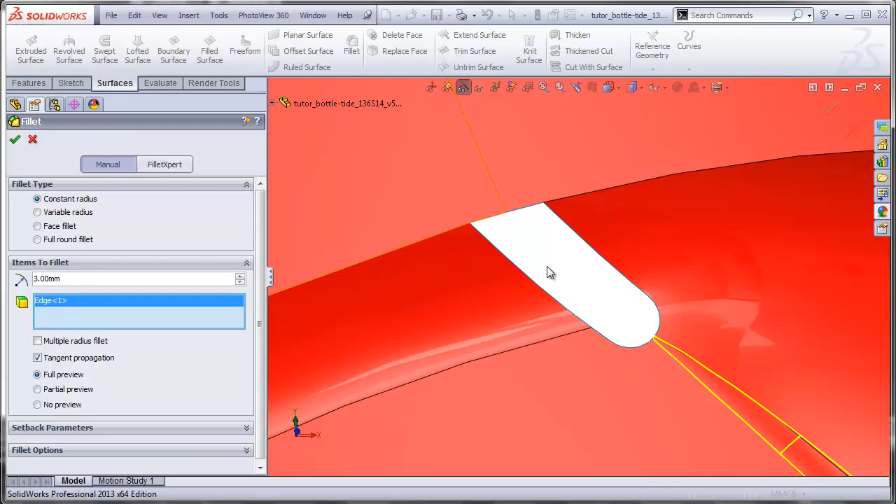So what I'm hoping is that when I patch this in, since it's very narrow on either side of the original edge, it will more faithfully follow the contours of this area and look better when blended in. I'll patch this in with a fill surface, but first I need to add that fillet to this edge, which was 3 millimeters. There's my fillet, and going to my filled surface, we'll select this perimeter of the opening, a short edge here, an edge here, a short one here also, and that finishes the surface.

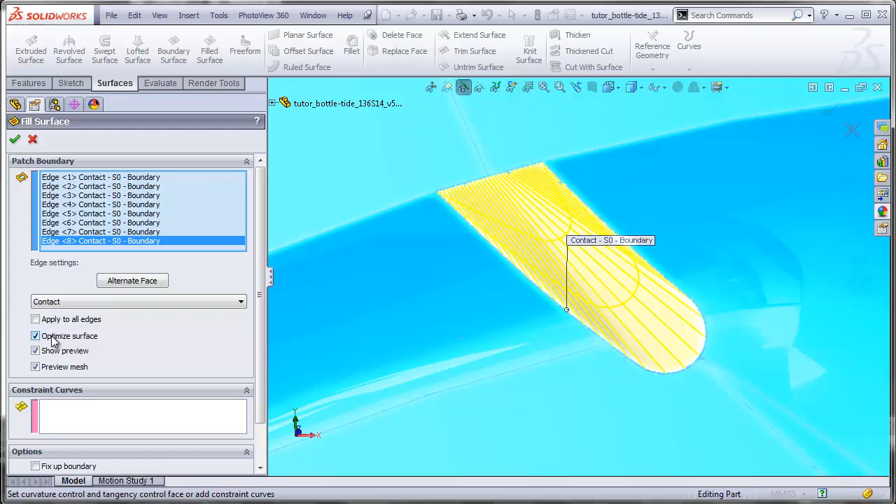Sometimes optimize surface can give an odd result, so you might want to uncheck that. See, that smooths out the surface a little better. And I want to set all these edges to curvature if I can.

Apply to all edges, and if I finish that, I see a bulge here, which reminds me that these two edges should just be set to contact, because I want an intentional sharp edge along here where later I'll add a fillet. So going back and editing that, those were the first two edges, so I want to make sure I first uncheck apply to all edges.

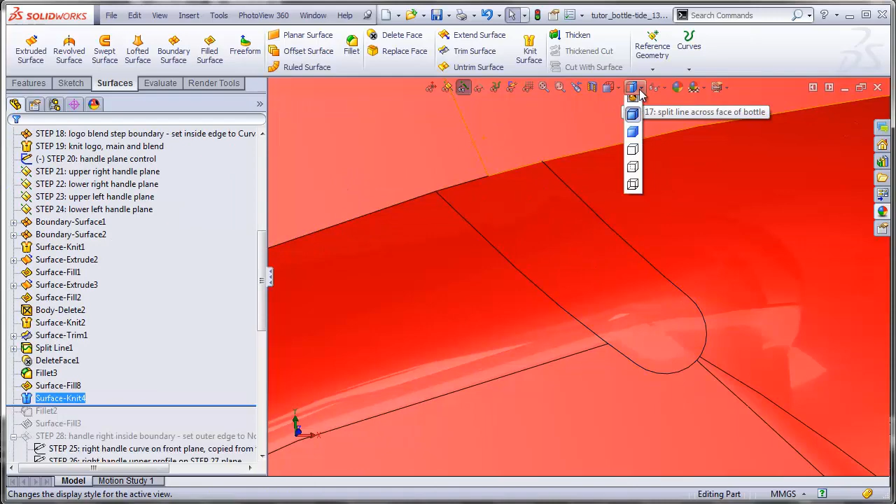We'll set edge 1 to contact and edge 2 to contact. Finish that up, hide all our edges, and take a look at that. That doesn't look too bad. We can see a little bit of a lump here. I don't know if it's any better or worse than the other approach.

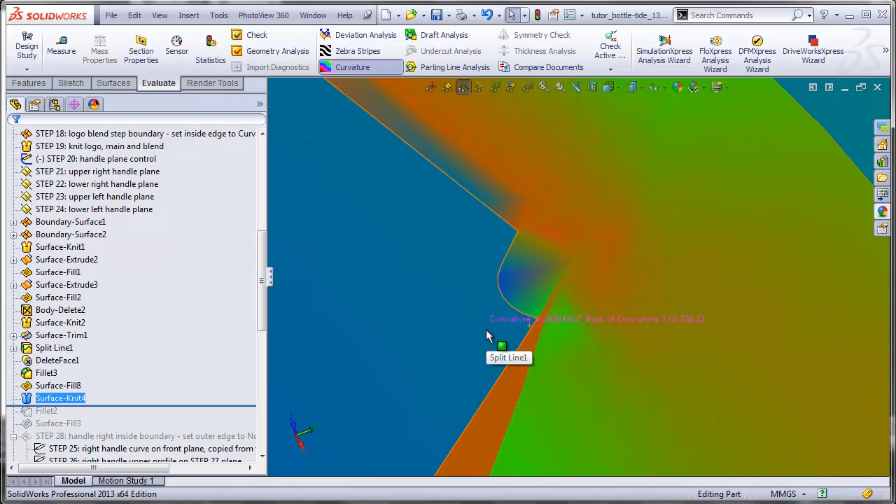If we go to our curvature here, we can see this blending together. It blends a little funny, but it's probably no worse than the other method, and might actually be a little better. In any event, for now I'll just leave my circular patch down at the bottom and my elongated patch at the top.

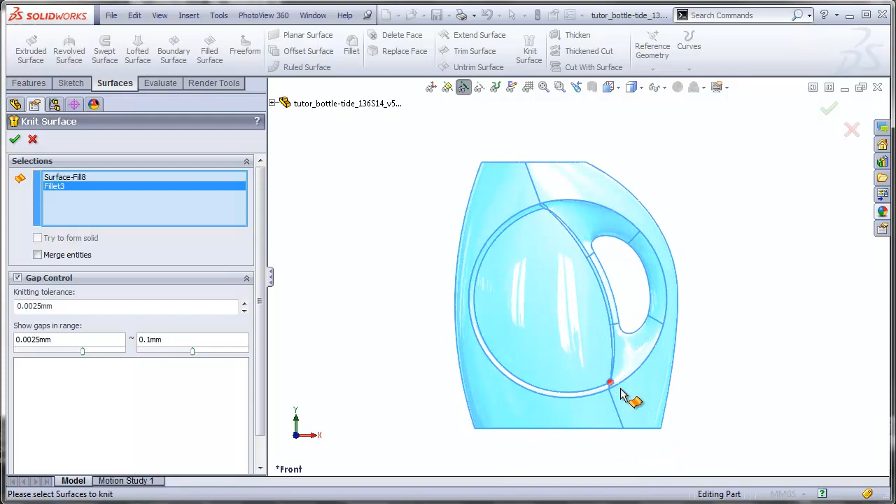These need to be knitted back into the bottle. I deleted the knits I temporarily did earlier just to look at the surface contours. Now I'm back to a single surface, and I only have one more step to do for this video.

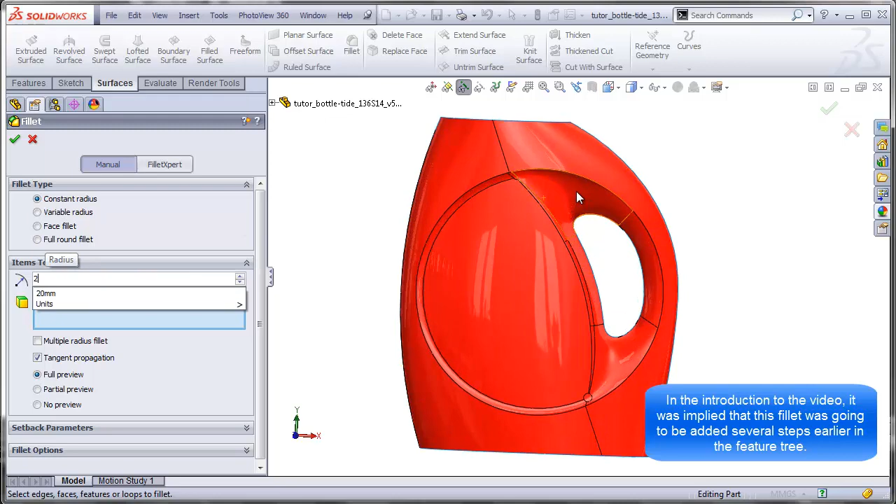That's to take this circular edge and add a fillet to it. If I just add a simple 2 millimeter fillet using constant radius and click on this edge, it should automatically go all the way around. You see the problem here though, because the surfaces that meet at this edge are meeting at all kinds of different angles, and the result is that the width of this fillet changes as it goes around.

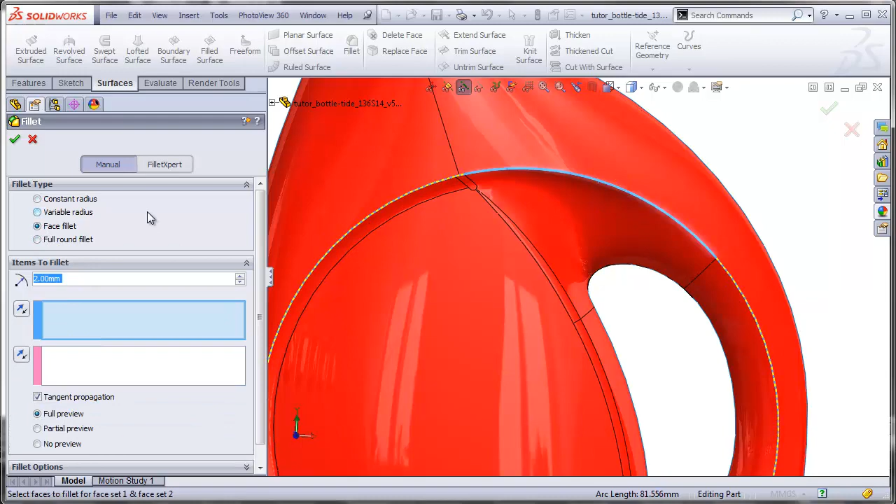That looks a little unsightly, so I will change this to a face fillet. For my first box, I'll just select the outer surfaces of the bottle, and for the other box, I'll select these inner surfaces, which will include this, this, and this. And I need to get this portion of the handle, this lower fill surface.

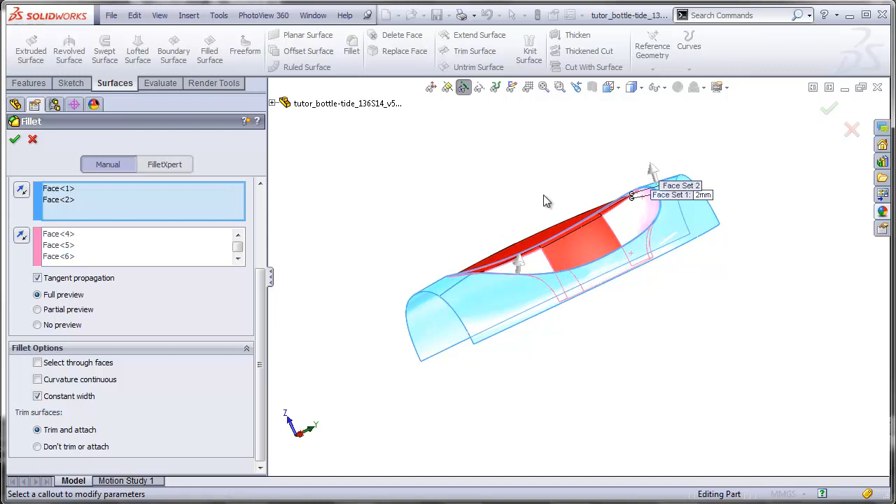And I want to set this to constant width. Now you notice I'm not getting any preview for that fillet. The reason for this is the direction the fillet is set in each of these boxes. You see both of these have arrows facing outward. This fillet needs to go to the inside of this surface and to the inside of this surface so that it's curved this way, and right now it's trying to make a fillet going to the outside of the two surfaces.

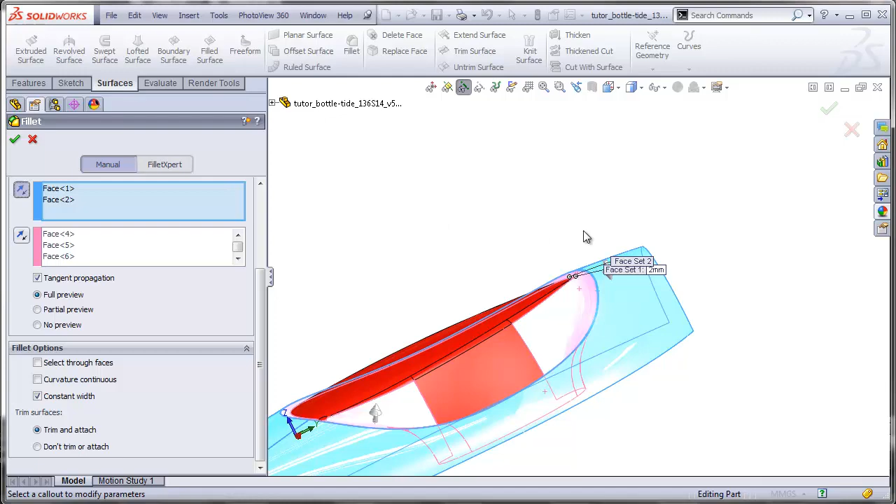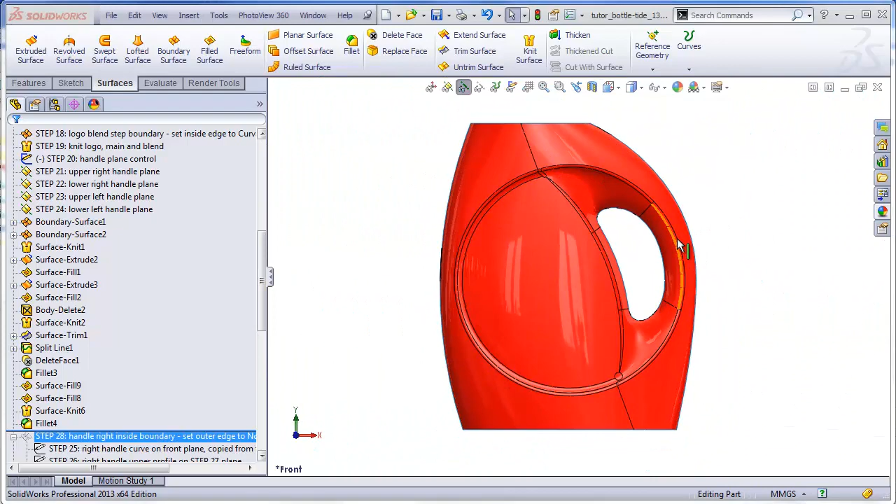So I need to toggle the direction of these arrows. You see it's flipped this arrow inward, and now I need to toggle my other arrow. Let's flip that arrow inward, and now you see we get the preview for the fillet. So just finishing the fillet now, and taking a look at this from the front view, you see we have a nice looking fillet with a consistent width all around the circular perimeter.

That concludes the construction of one half of the bottle and this video. In the following video, we will mirror this bottle over, complete the top and bottom, and the neck and the cap, which will give us a completed project.